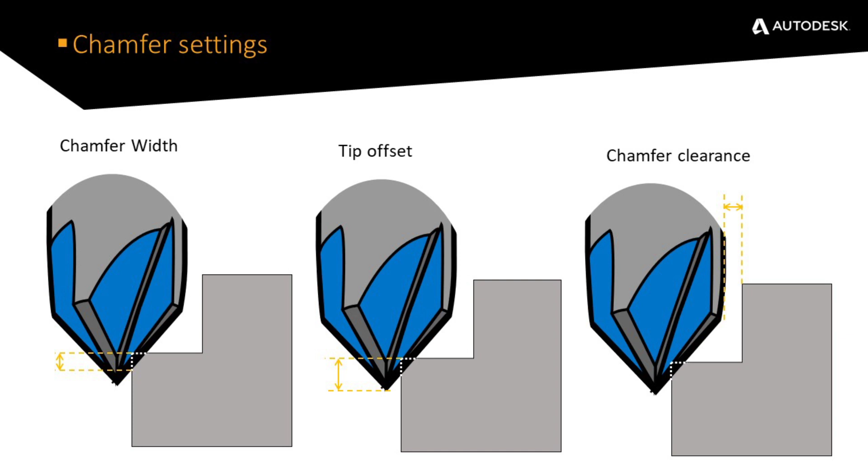So we've got 2 chamfers here on these 2 bosses, nice and easy to start with. I'm going to go down to 2D chamfer. First thing I need to do, of course, is select my tool, that's what I tend to always start with. I'm going to be using a 45-degree chamfer tool, 12mm diameter for this.

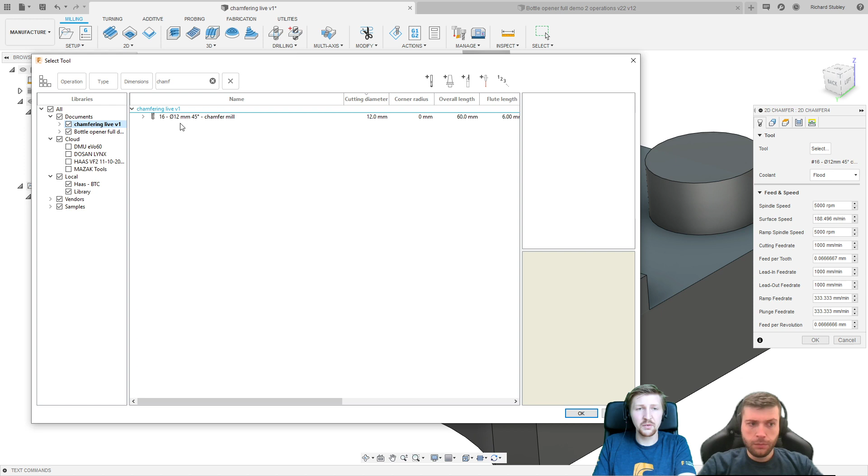If we just have a quick look at how I've defined this, we can start to have a look in here. Let's go on to the geometry actually first, I suppose. We're going to select just that one contour for now.

We're going to have a look at our passes tab, and I just want a 1mm chamfer. Now I'll go back to my tip offset, I'm going to leave that at 1mm for now. And then we're going to simulate, see what it's like, and then adjust it to get back into that sweet spot.

And then we've got the chamfer clearance, that's not going to make any difference here, we've got loads of space around the part, we're not going to be getting anywhere near any sidewalls. Again, not talking about feeds and speeds at the moment, we're just having a look at the toolpath and setting that up.

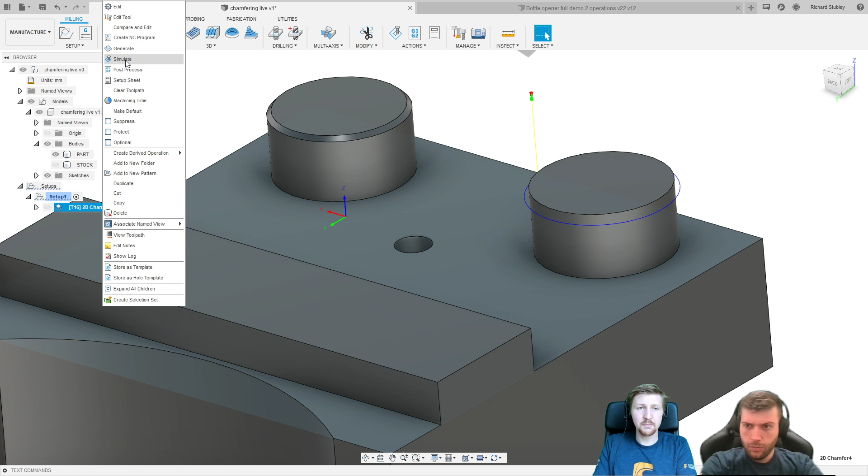So there we go, let's just simulate this, and let's play that chamfer on there. So again, we get a nice chamfer.

Little trick here that I do: if you're ever chamfering the model, I tend to turn the model off just so you can really see what's happening. Otherwise you don't really get a good idea of what's going on because the model's in the background there.

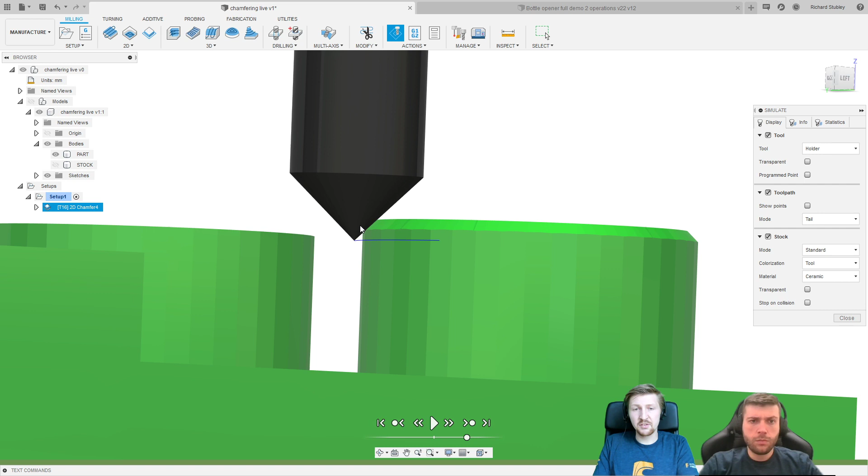So let's jump out of simulation mode again, and turn my model back on just so things look correct.

Then I'm just going to edit my chamfer toolpath. In my tip offset here, I'm going to put 3mm in. I'll talk about why I chose 3mm once we see the effect it's going to give. And then let's just simulate this now.

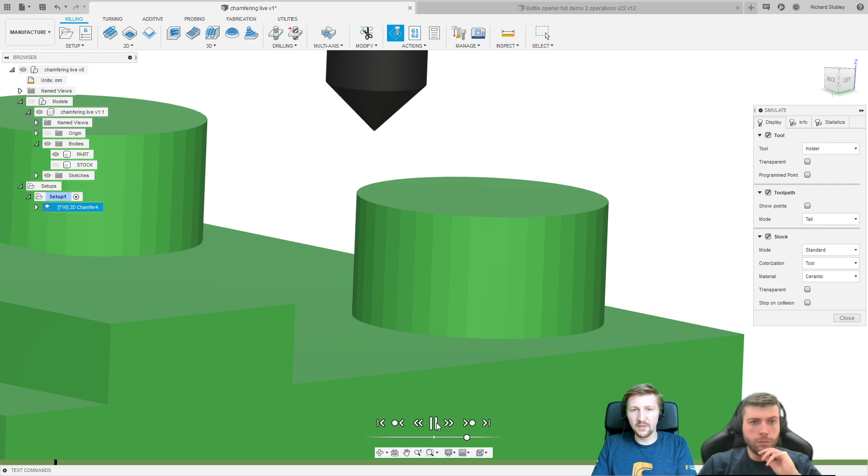Again, turn my model off, run that toolpath again, and I'm just going to pause it when it gets around the view. So we can see now we've managed to get much higher up. I could probably go a little bit higher if I really wanted to. We've got much higher up on that flute. We could have probably doubled or tripled our surface speed in that small move there.

So these little tips and tricks really do make a big difference when you're cutting using chamfer tools, and it's definitely worth spending the time to do a couple of test runs on your machine. So if you tend to use a 12 or a 6mm, just get to know how the tool wants to be used, the speeds and feeds, and then you can apply that as you go.

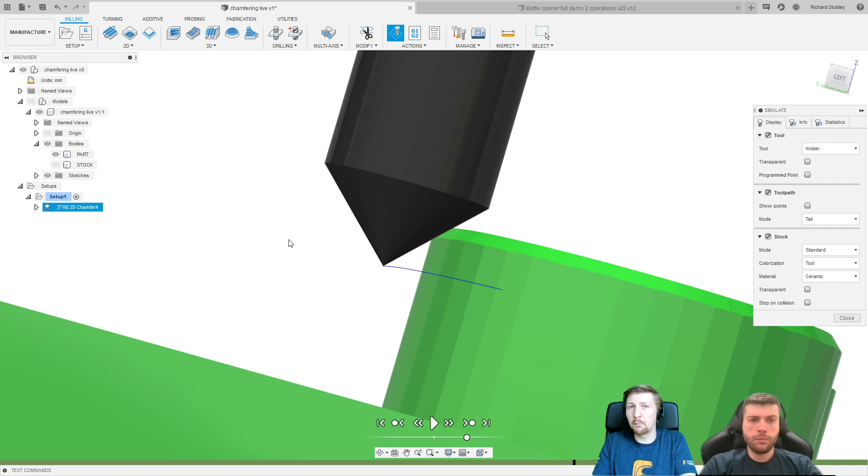Let's just close that again now. So I didn't just guess 3mm. I did a little bit of a calculation in my head, but I don't want to do that in my head every time I actually do the chamfer. So this might be new for some of you, but you can actually do expressions and calculations in all these boxes. So I'm going to do edit expression.

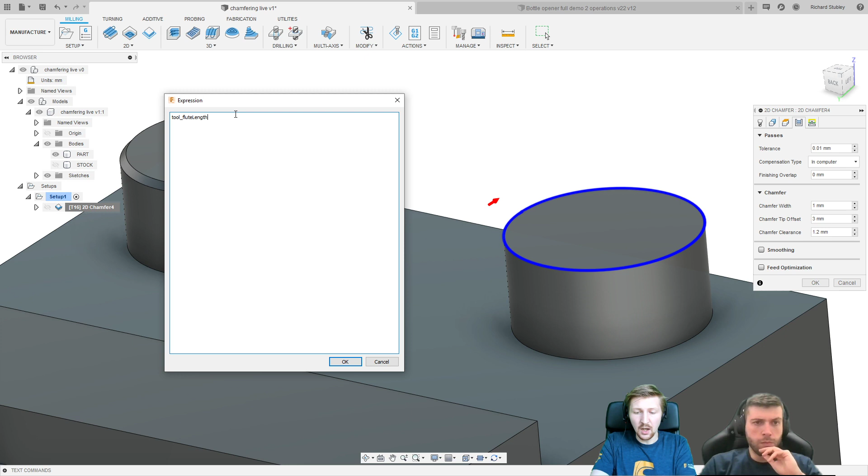That was just right click, edit expression there. And I'm going to choose my tool flute length. So that's going to be 6mm, because it's a 6mm flute. I then want to sort of minus my width, so my chamfer width. And then I want an extra millimetre of clearance on the top of that tool as well. So let's go 1.5, let's go 1.5mm. So that's going to be the expression in there now.

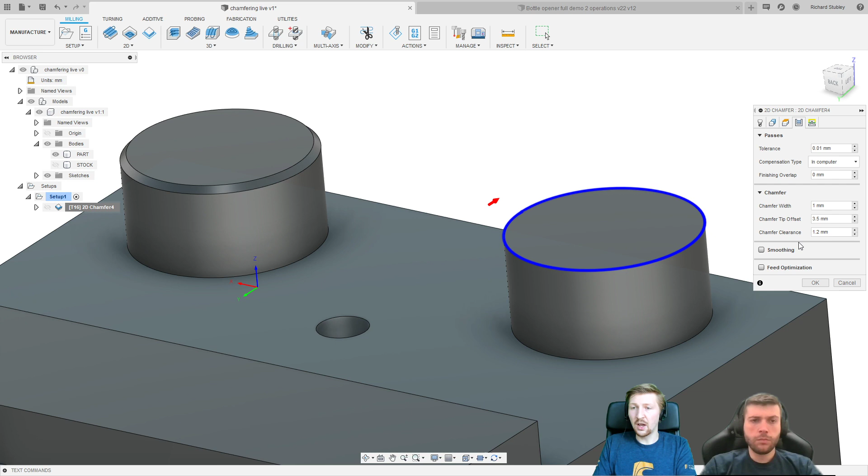So it's basically told me that my tip offset is now 3.5. So that's going to leave 1.5mm above the tool where I'm not in that zone where I'm risking a burr because I'm too high up.

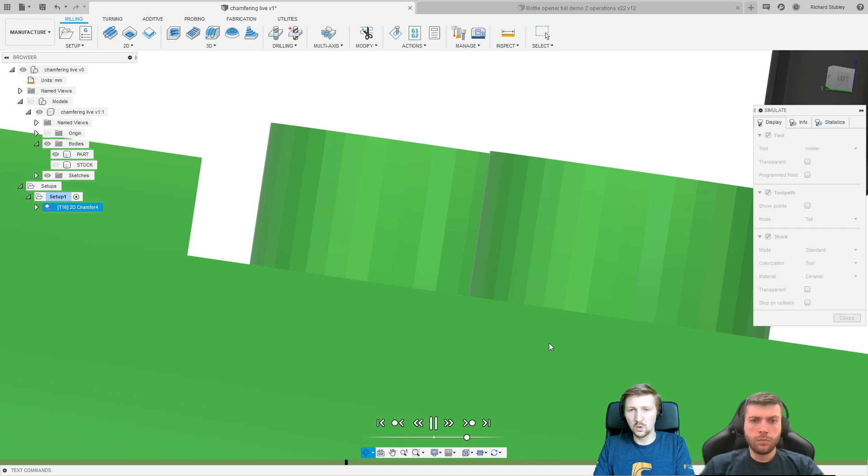So let's just play that. Again, turn my model off. Let that tool come all the way around. And you can see now I'm really getting a good portion there. Now the brilliant thing about this expression is that that's going to be there every time I want to do a chamfer.

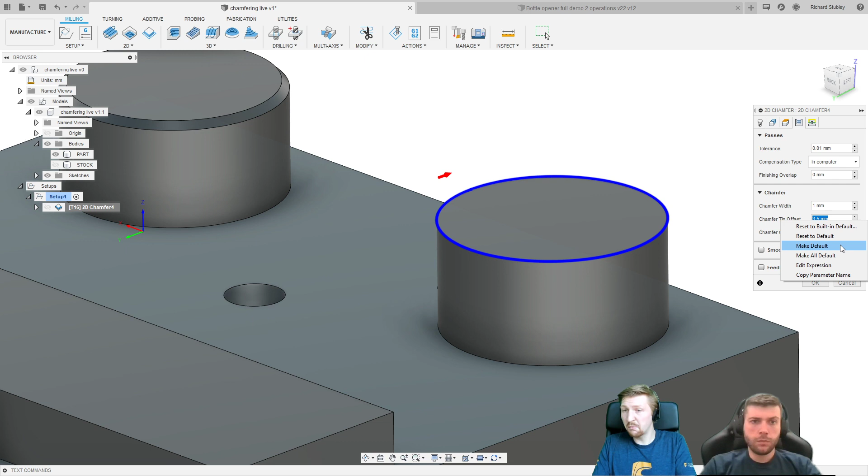So what I can do now is right click and edit. If I want to, I can save that as default. So I can make that as a default. So now that expression is saved as a default. Every time I come to do some more chamfering, it's going to be there.

So that's a little bit about how we've machined that one. Let's quickly do that again. And let's go 2D chamfer. Let's pick that contour. It's remembered my tool because I've just used it. And again, we've got this perfect scenario here where it's known that chamfer width.

So if I just change that chamfer width to 1.5, you see it's just changed to 3. You get the idea. If I change that to a 2mm chamfer, it's changed my tip offset. So that's a really good default to have in place. It's one that I personally have, but you do need to know where that's not going to work. So there are a couple of scenarios where you're going to need to override that default that's in there.

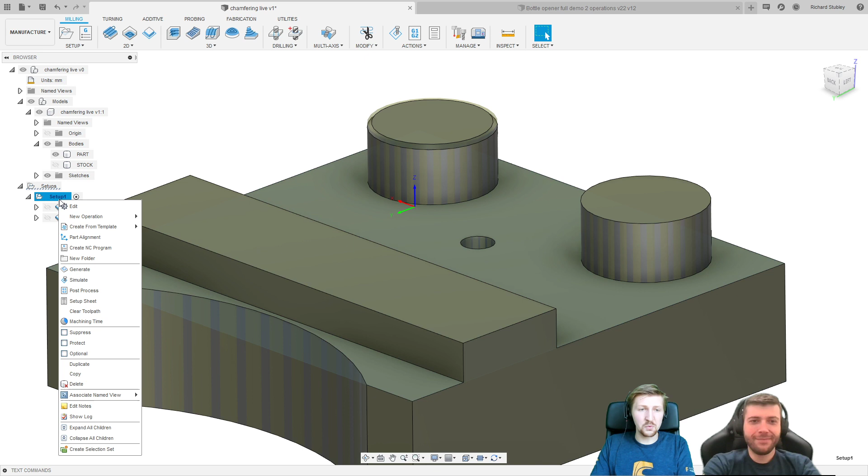Let's just have a quick look, make sure that everything's working as it should be. Turn the model off, hit play, turn the speed up a little bit on there. There we go. And that's putting a really nice big chamfer on there for me.

But again, one thing that I just really want to point out in here, if we just reverse a little bit as we go up, you'll see here that we've got a red plunge move here. So unfortunately, that's going to be a really slow feed rate. That's because we tend to prefer safety over speed in Fusion.

But what we could do is actually on here, we can look at that toolpath I've got here. I want to edit that, go over to my heights, feed height, and actually disable that. So it's going to go right down straight away at the rapid speed and not do that really slow move. So let's simulate again.

And I'm just going to press play. Let's turn that model off again. So chamfering there, I'm just going to slow it down now. Hopefully you can now see, there we go.

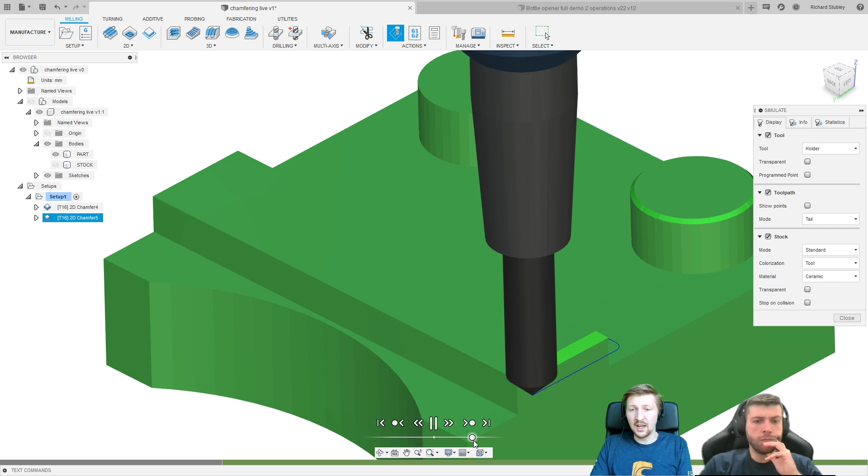That red move has now turned into a yellow rapid move. We prefer safety over speed any day of the week, but I know personally I can disable that plunge move and just rapid straight down and move across. This is just showing some little tips and tricks you can do. If you really want to be brave, you can set that as your default, but I personally prefer to leave it to do the plunge on the slower speed, and then if I remember, I'll turn it off.

If I forget, I go slow. If you do the opposite way around and you forget, you crash the tool. So I prefer to always put safety over speed, in my opinion.

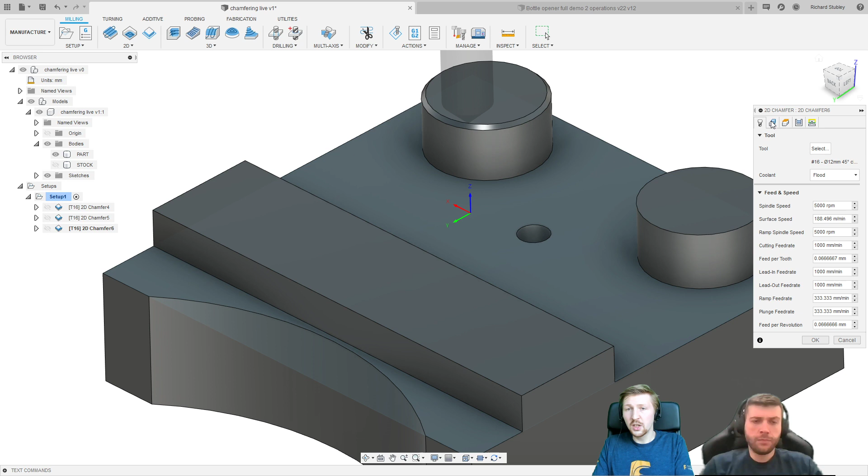So what we've got now is a modeled chamfer. We had a non-modeled chamfer on here, and we've got a modeled one here. I'm going to go 2D chamfer, choose my geometry. Now this is the key one - I'm choosing the top contour on this. So when the chamfer's modeled, you choose that top contour.

But one thing I need to bear in mind now is that what I chose here might not be correct. I'm just going to press OK and run through and show you what I get. I'm going to leave it at 1mm chamfer, leave that tip offset in, chamfer clearance, leave all that as it was, and see what we get.

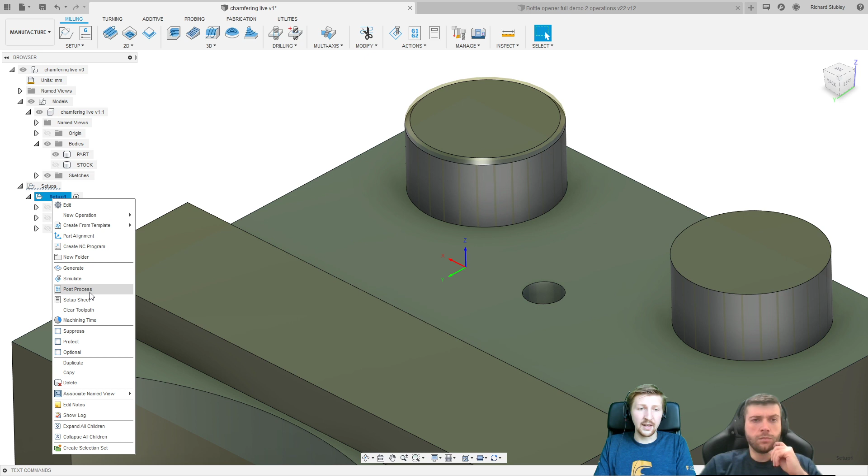There's a lot of simulation in this. I'm just going to run through those two toolpaths, and go to this next one here now. You might notice that is a huge chamfer in comparison to that one, but I set 1 mil, so why hasn't it worked?

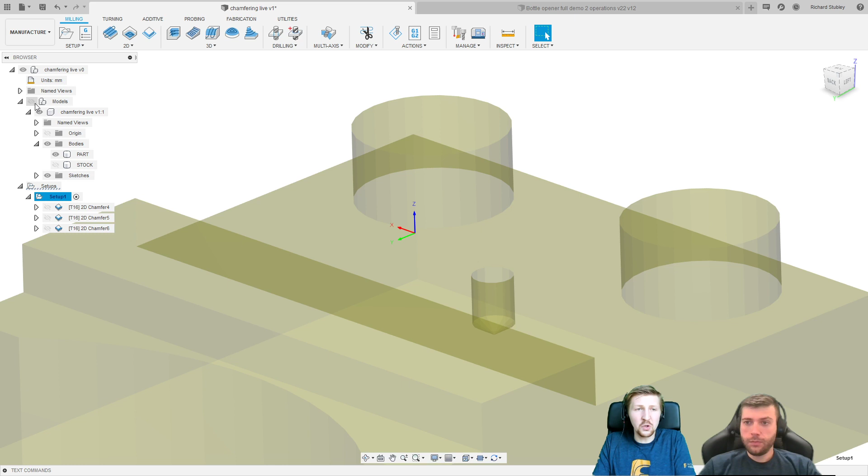It's all to do with if it's modeled on the part - what you've effectively got is a 1 mil chamfer that's been modeled, and then an additional 1 mil chamfer that you've programmed in there now. So I need to remove that and set it at 0. Remember I said earlier about watching out, that default you've just put in could catch you out occasionally, and this is an occasion where it will.

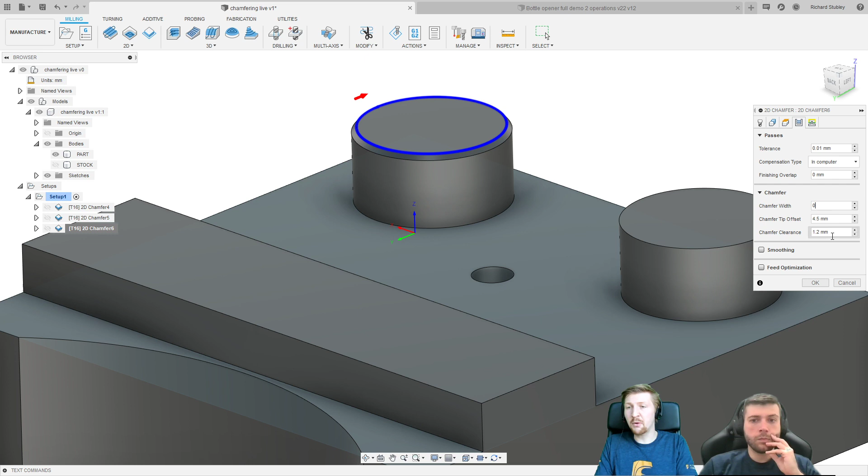I'm going to leave that at 4.5 for now and just show what happens. Just to quickly go over that in case you missed it: if the chamfer is modeled, you choose the top contour, then go to passes, chamfer width 0. Okay, cool, there we go, cancel.

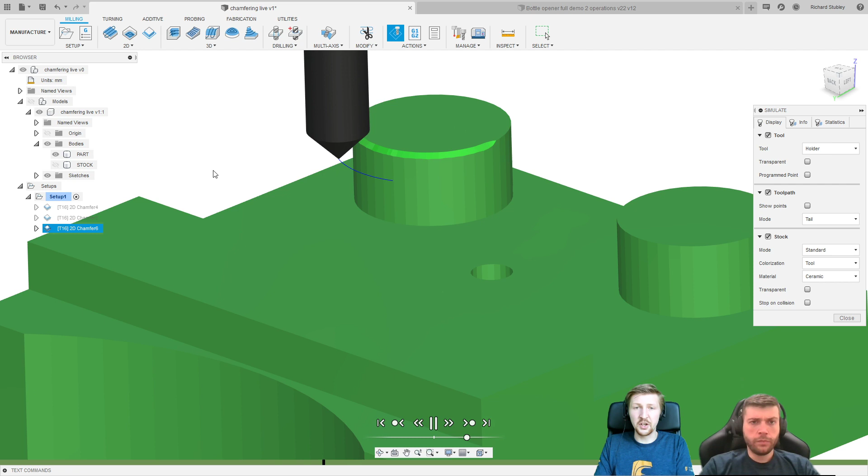I'm just going to simulate that one and turn that model off. You can see it's doing the correct 1 mil chamfer, but it's a little bit too high on that tool for my liking. That's because the default on there for the calculation I set is no longer true.

Because of course, if I look back at my expression, I had the chamfer width in there. The chamfer width doesn't now exist, it's 0 because the part was modeled. So I need to make a manual judgment on this - I'll probably go back and set that manually at something like 3.5.

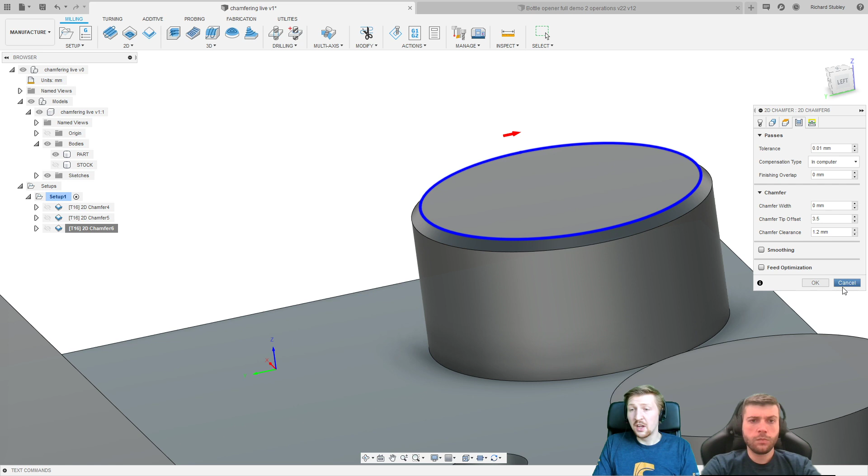So yes, that default is brilliant and it works for non-modeled chamfers, and if you want to, you can set it up for modeled ones too. But just bear in mind, if you start setting yourself new defaults, you've got to know the cases where that will work and where it won't. I hold no responsibility for any broken chamfer tools.

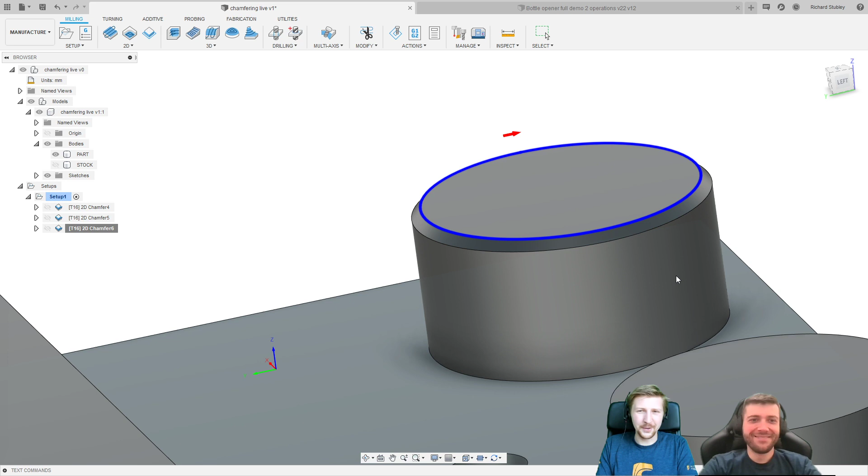So there we go on there. Okay, cool, so we get on there.

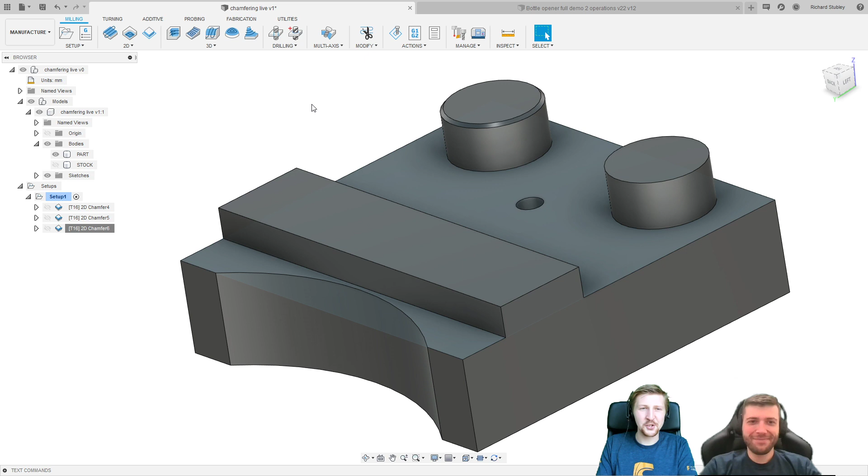If you've got any questions, I'm a bit famous for being able to talk all day long without stopping, so please just chuck your questions in the chat. Paolo will interrupt me, as he does most days, and let me know what's going on. I see we've got a guest, Alon, watching us, making sure we're all doing all right, making sure we're 6 inches apart from each other. If you could convert that 6 inches into metric, please, Al.

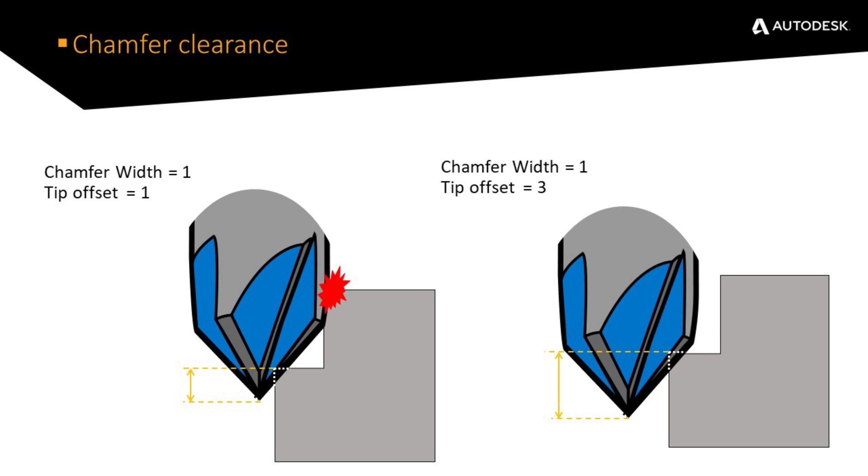So that's just a little tip here. You've got to look at this and try to balance up how things are going on there, really. Okay, so what does that look like in practice?

What we've got on here, we're going to do a 2D chamfer, and the first thing we're going to look at is this contour around here. I'm just going to do a 2D and go contour selection. But I definitely don't want to do that contour, I just want to go around here. So a little tip for you all.

If you hold down Control and Alt, you actually select an open contour. And what you can do then is start to go into there and edit the way this is selected. So let me just try that again.

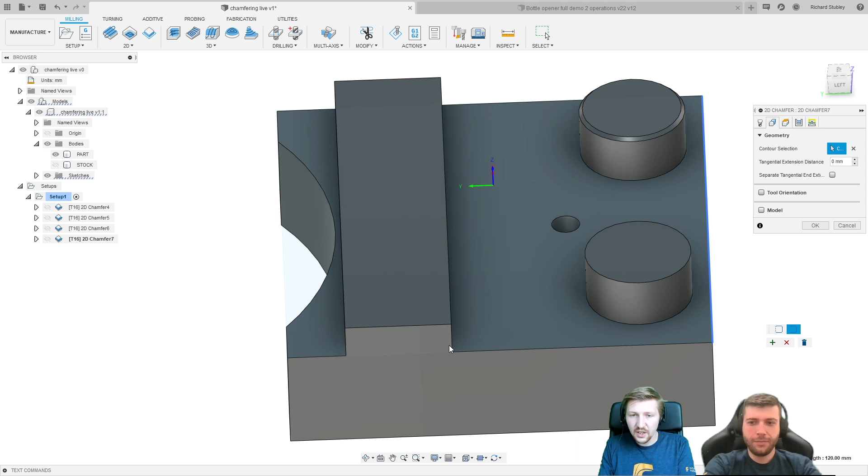So I'm going to choose the contour selection, go on there. I think I've got a weird bit of a surface on there. Let's go for this one instead.

So let's go 2D chamfer. I'm going to choose that one. So you can see I'm really quite close to the edge over here. I'm actually moving around now and coming back to there. So that's what we've got.

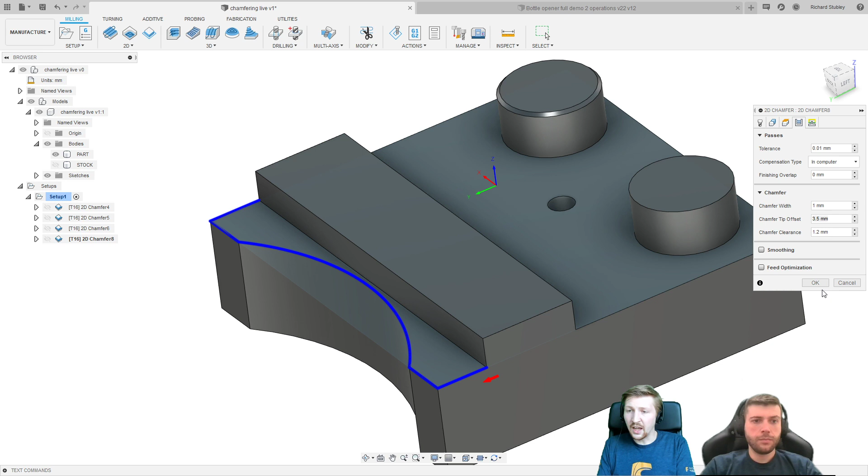I'm going to go on to the passes. Chamfer width again, 1. I've got my automatic expression there that's calculated a really nice position for me. I'm just going to hit OK and see what happens, and we'll talk about the result we see here.

So we've got a broken chamfer there. And what it's done effectively is it's done what it can do respecting the parameters that we've entered.

So let's just simulate this and see what's going to happen slowly. We're going to cut what we can there. We're going to then come over, just turn that model off, and then cut the other side. So there we go. What Fusion's basically done is, you've given me a set of parameters, you've given me a contour, and I'm going to try and machine as much of that as I can, as safely as I can.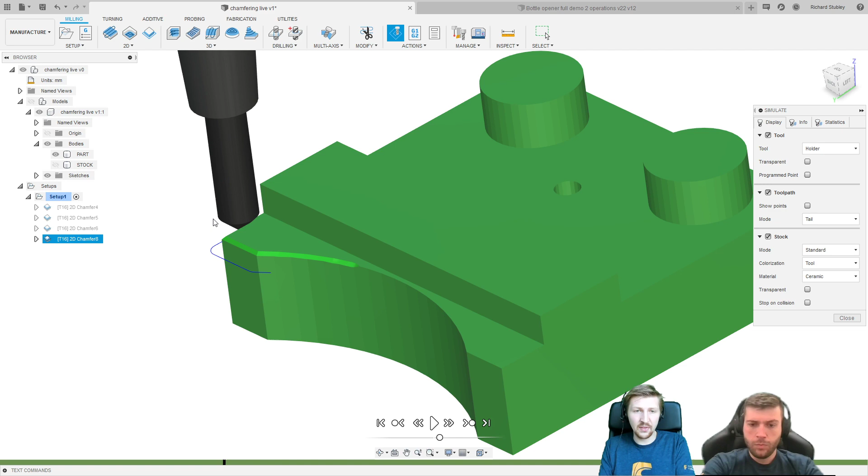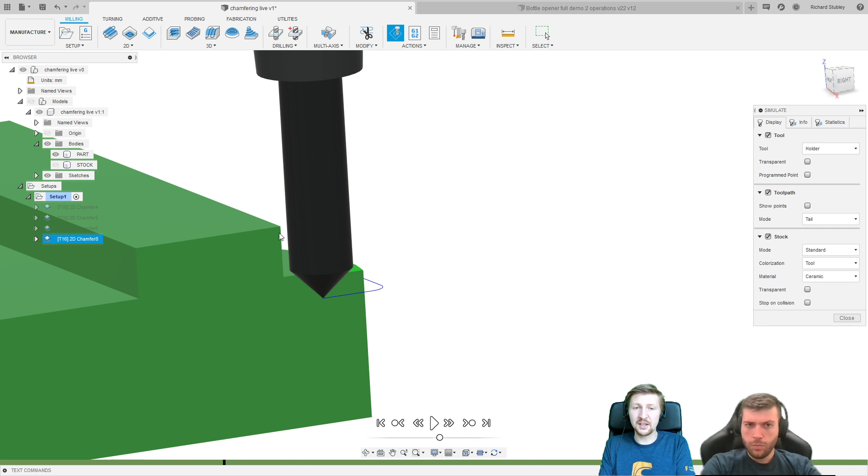So I want to talk about two aspects of this toolpath. The first one is I want to see how close we've got to that wall at the end there. Bear in mind that my contour selection went right up to this edge here. Of course, we know there's no way I can get exactly there because I'd end up hitting the shank of my tool against the side. So what Fusion's done is respected that 1.2mm chamfer clearance and kept 1.2mm from the side wall to the shank of the tool. So that's what we've got here.

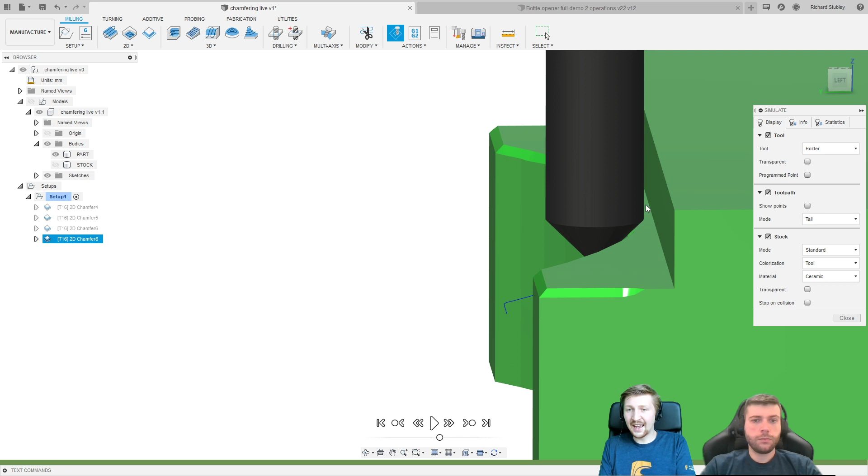Now the second aspect of this toolpath is this big gap in the middle effectively that I've got. So let's just model it up. And again, that's doing exactly the same thing. So if I just leave that tool just there and have a look, it's saying I cannot get any closer with what I've got here.

I've heard people call this the magic chamfer tool before, but I do think it really is one of the most underrated functions that we've got at the moment. It's so clever, and it's saved my skin on many occasions.

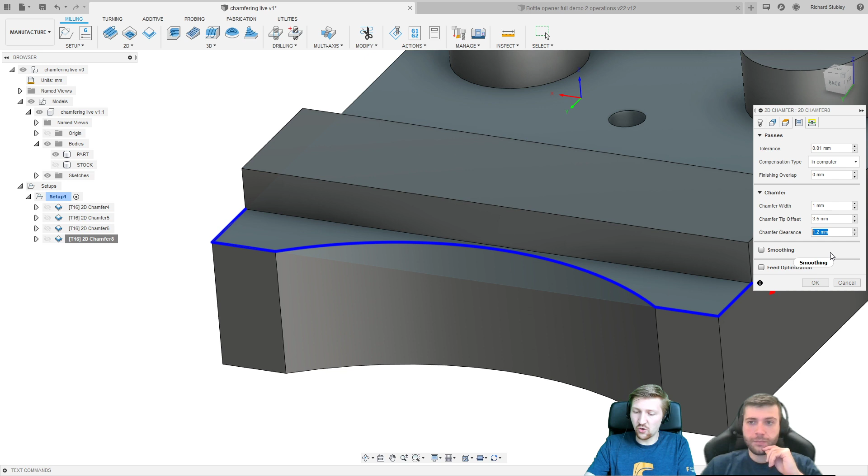So I'm going to go to my passes, and I'm going to be brave. I'm going to drop this down to 0.5mm. I'm just going to hit OK and see what result I get. So it's got a little bit closer. I've got a bit closer over here, but I've still got this big gap in the middle.

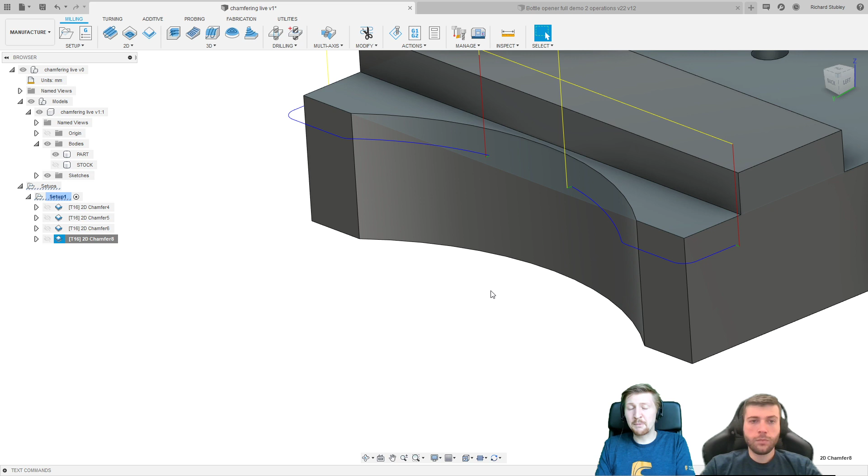So let's try and go a little bit braver still, and let's go to like 0.2, see what we get. You basically see that this is just a big balancing act, really. And again, I've got a little bit closer there, a little bit closer here. Let's simulate it and have a look how much closer I've really got.

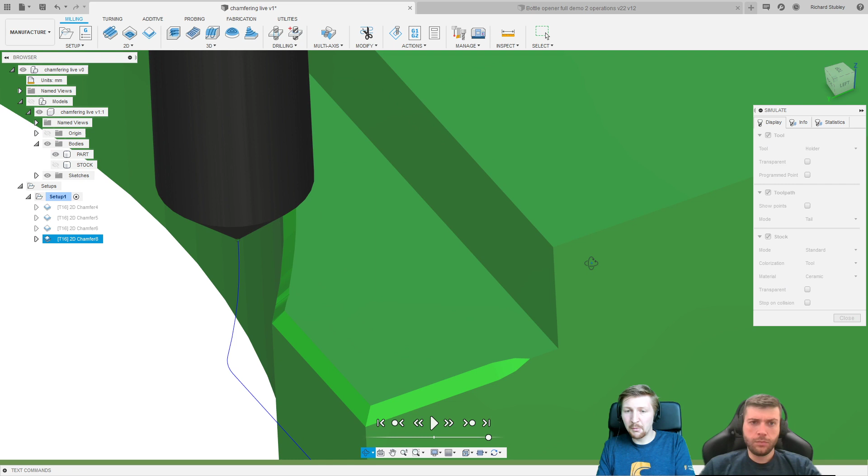So I'm getting a little bit closer. Every time I make a change, it's getting a little bit closer over here. But I've still got this big gap in the middle.

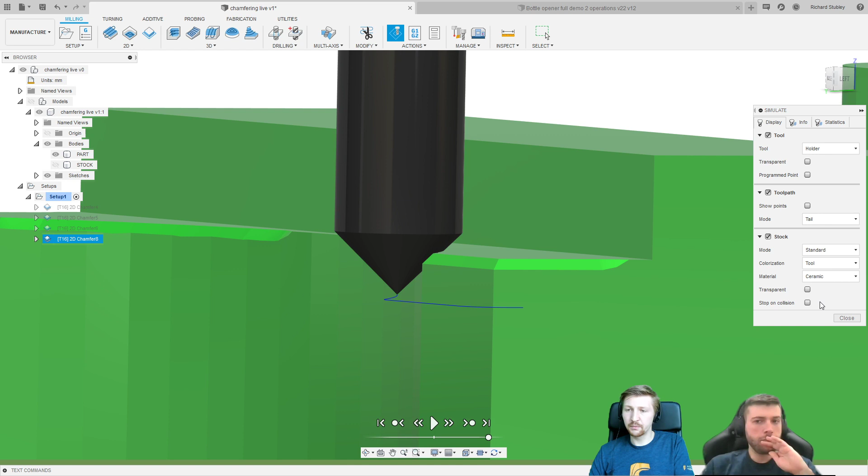That's because I'm going to have to start making sacrifices now on my tip offset. So like I said earlier, we had that sweet spot up here, the no-go zone at the bottom of the tool, and the no-go zone at the top. We're really going to have to start pushing this tool down to here and get that top portion. So let's come back in.

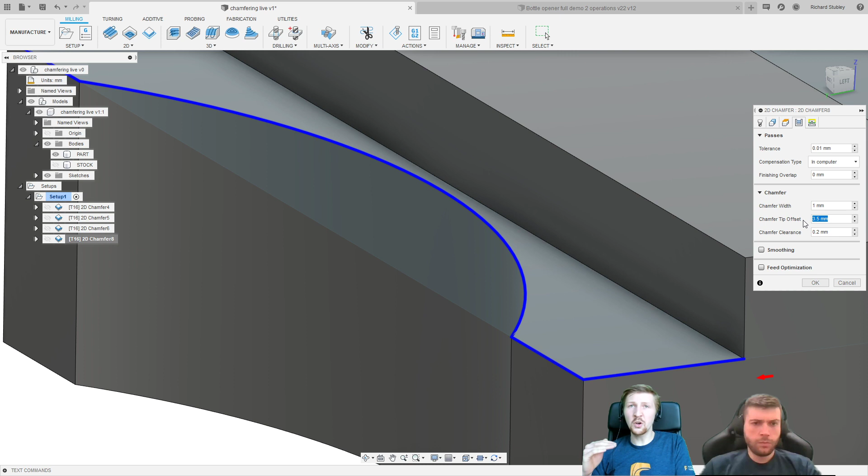Let's just edit this. And what we've got now here, I'll go to top tip offset. So how far can I go on this? If I'm honest, if we're not looking at the problem with the burrs, we can go straight to 5mm. So what does that look like?

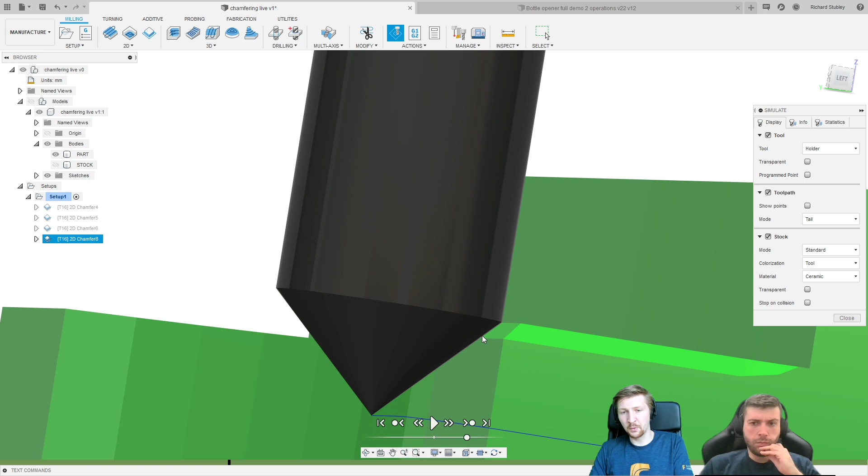It's got the full contour selected there. Let's simulate this. In theory this will work, but in practice everyone knows there's no way that's going to give you a good chamfer with that being right there. The whole point of that is it's come round, and we've got minimal clearance now over here.

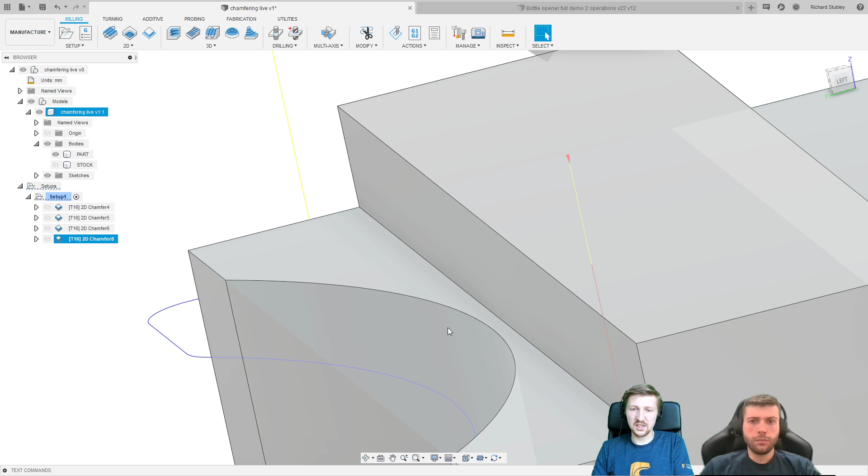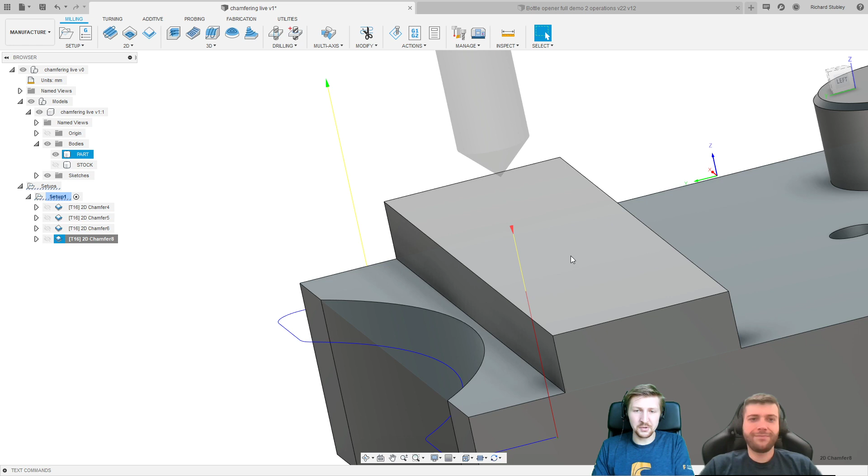You can start looking at it, I could measure that distance and start calculating it out. But if I'm honest, I'm quite lazy, so I just use the calculation speed to my advantage, and play with these numbers to see at what point it breaks up. So 4.5 it broke, let's try 4.7... let's have a look at 4.6. It's broken up again, okay.

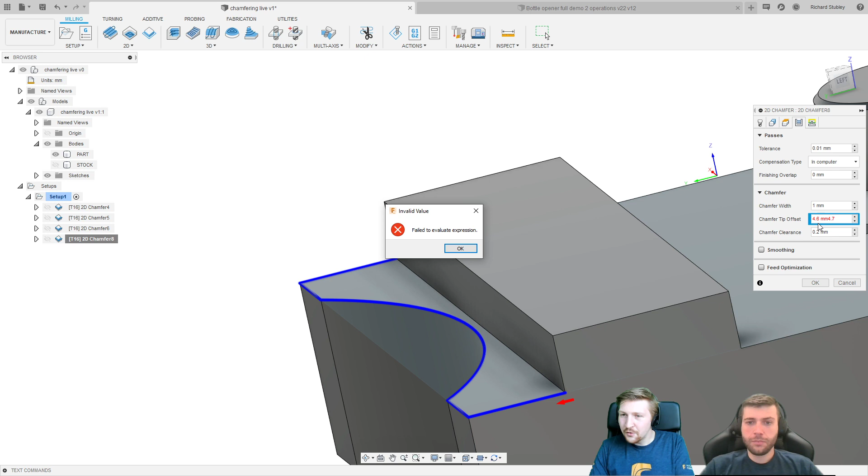So let's go back to 4.7. Again, my mathematics, there we go. It fails to express at 4.6mm, works at 4.7. I mean, why isn't it clever enough to realize I made a mistake there? 4.7 - so again, it's realized what I've got going on here now, and it's got us close to there.

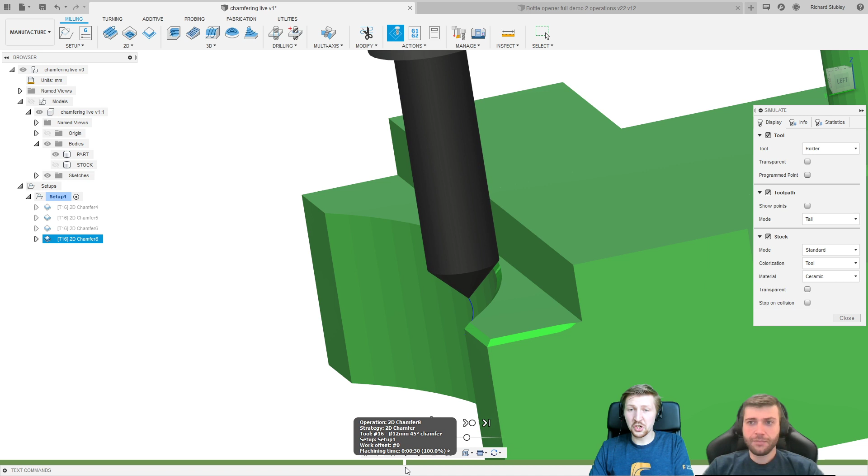Let's simulate this and see what it really looks like. Hopefully you're seeing the difference between balancing tip offset and chamfer clearance. They're both two different things, but they do work together - you do need a bit of a balance of the two.

So again, that's going to work. It's not going to be the best - it's getting a bit too close really to the area where we're going to get burrs, but I'm confident that for just this small part, it's going to be good and it's going to work for me.

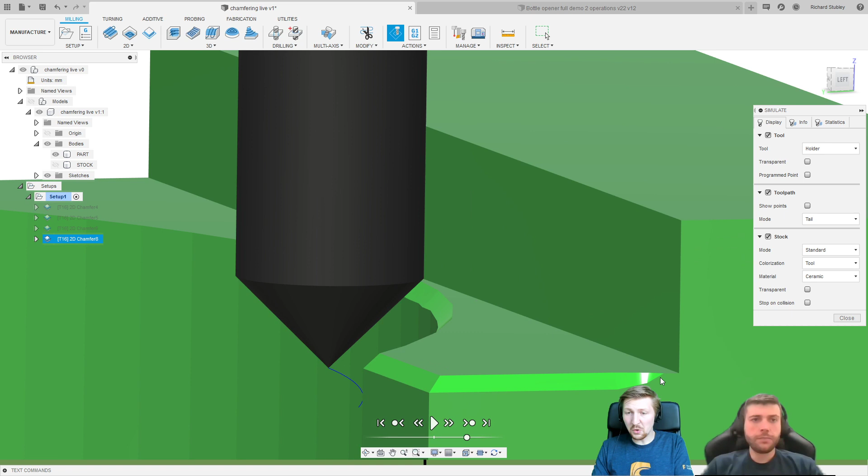We can also see how close we've got to this edge here. Imagine if you had to try and calculate how much to back off this edge, and restrict how much you're doing. It's a really nice function that you can back off there and it works automatically. So again, that's what we've got in here.

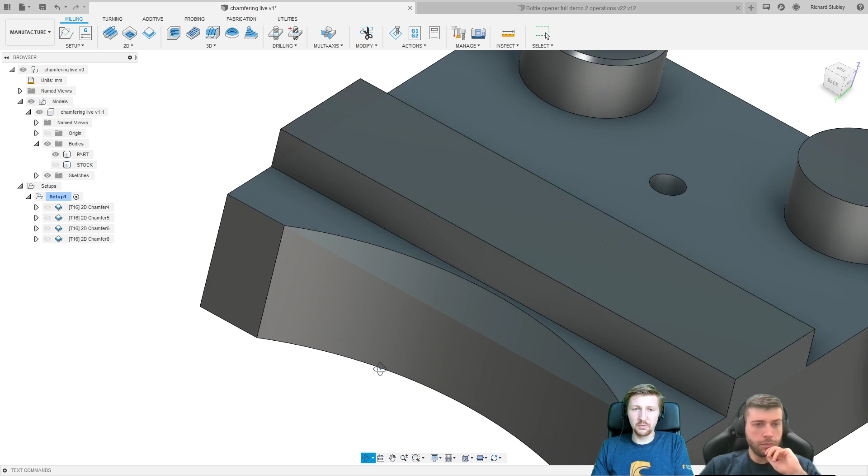So the eagle-eyed people amongst you will say, why haven't I done what I did before - gone into here and set feed height from, and then disabled that? So again, it gives me that really nice, quick rapid down, feed move here and here, cutting move in the blue, and back up again.

So if any of you are wondering why we've got these different colours, it's so you can see the difference, but also there's a little tip in Fusion which some of you might not know about. If I right click and edit, you'll notice that's a blue icon, the blue passes, and you've also got yellow and green there. The hint is that if you change things in the blue tab, it will change that one; if you change things in the green and yellow tab, it will change that one.

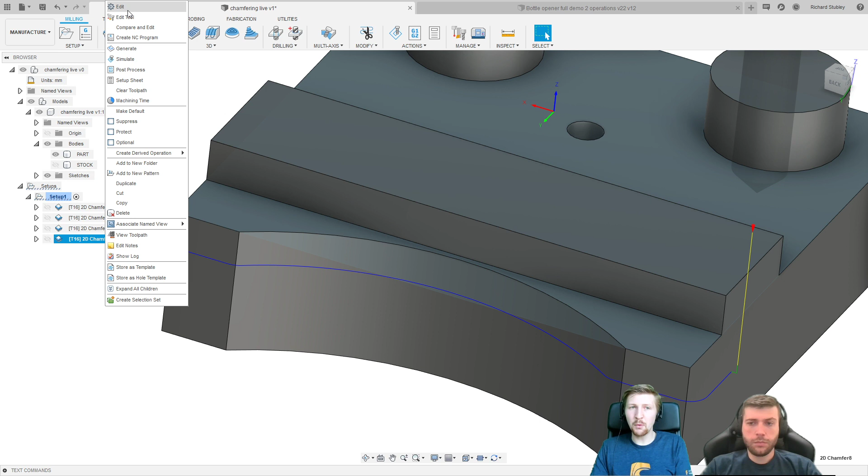So I'm going to put a little bit more linear lead-in distance, I'll put 5 mil just to make it big so you guys can see what I'm talking about. You can see I've adjusted something in that tab and it's adjusted the other one. The same goes for most of the toolpaths we've got. We try and keep that theory going, that you've got blue and then yellow and green, so that's the linking moves and the cutting moves.

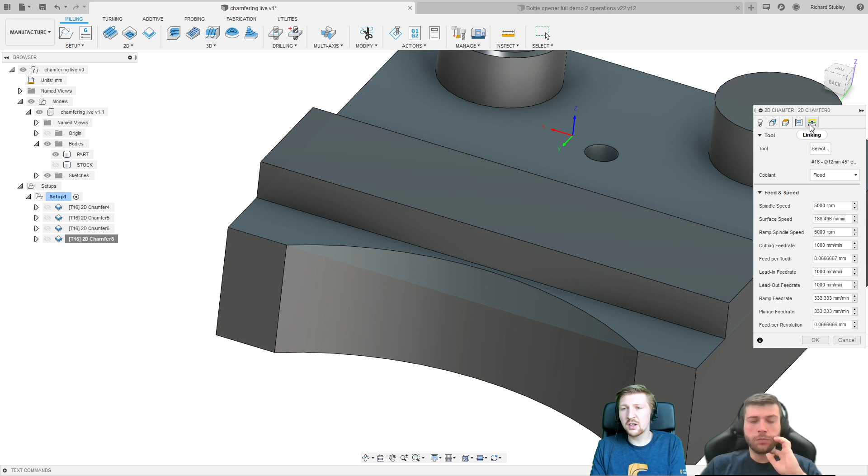Hopefully anything you touch in that pass will affect that one, anything in the other one will affect the other one. I mean, there are some areas where that does cross over a little bit, but that's the general consensus that we try and keep going.

Okay, so now I need to basically break all the rules I've just told you. So yes, I could put a smaller chamfer tool in to machine this. Let's just quickly see what we've got here. We've got an 8mm diameter hole there, and we're going to try and chamfer that with our 12mm diameter tool.

Now I could just come down and spot it, but I don't want to be doing that. It's not very good for the tool, you can get lots of problems with chatter. I want to use it like a chamfer mill and go in, lead into the cut, do the cut round, and then lead back out again.

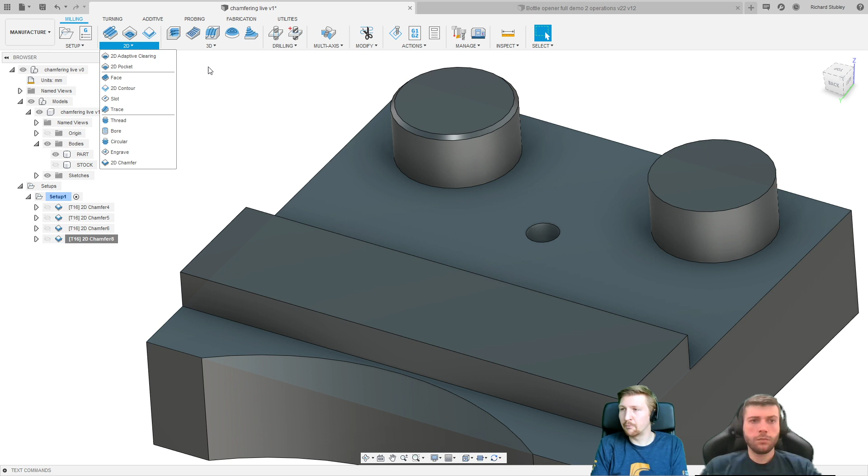So I'm going to go 2D chamfer, click on there, and I'm going to do nothing. I'm just going to hit OK and see what I get. So, got a warning. What have we got? Empty toolpath. The contour was not machined because the given lead parameters would cause a collision.

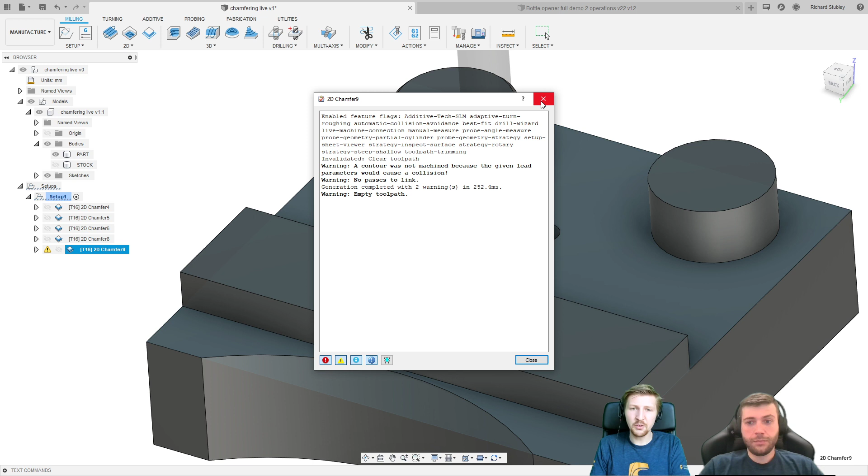Okay, let's have a quick look at what we've got going on here. So, let's edit this toolpath, let's look at our linking. So what it's saying is it possibly can't fit that in there.

So, let's whack this right down and see what we get now. Right, we've got something, but that is pretty much still going to be almost a spot. It's going to come down, it's going to do that. It is pretty much still going to spot that hole, it's not going to mill it properly.

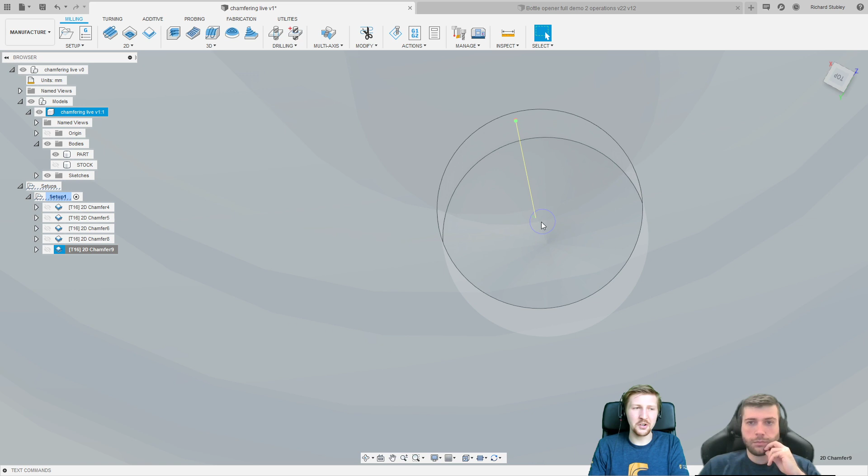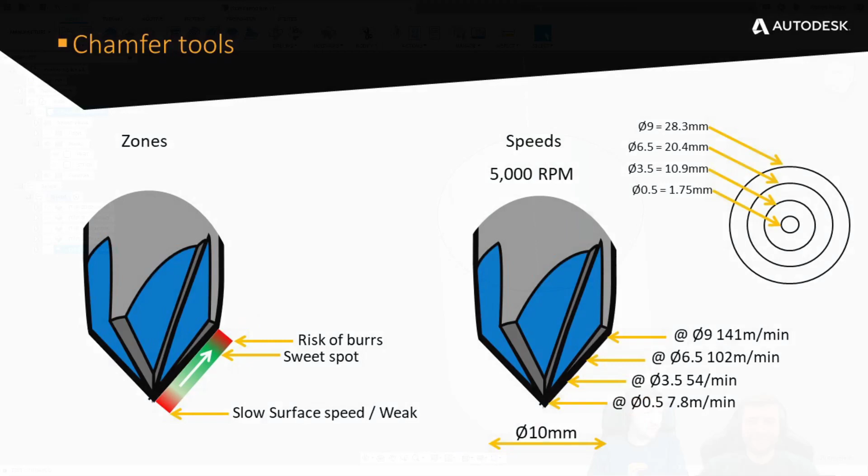And that's because I now need to break all my rules I was telling you. We go back to that first look at the chamfer tools, and we look back at that sweet spot. Unfortunately, I'm not going to be able to get that. So what I need to do is bring that sweet spot down for this little hole, go down a little bit closer to the tip, and effectively make a smaller chamfer tool by doing that.

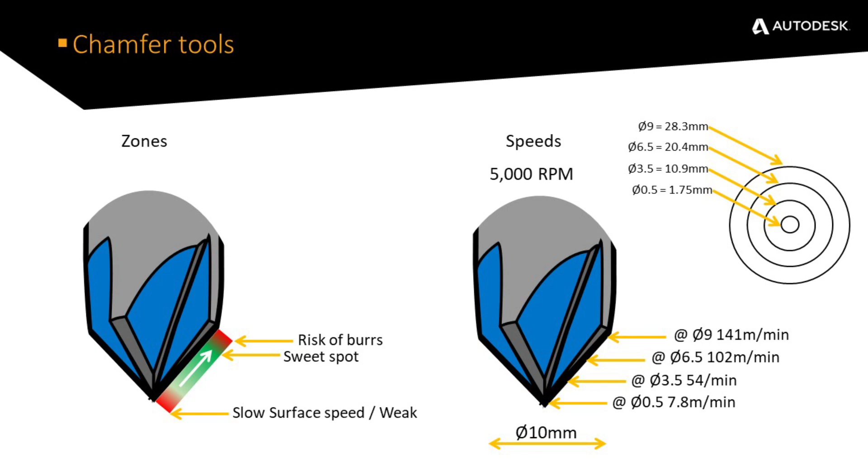So, that sweet spot sits at about the 7 diameter mark, so 7mm in diameter. I've got an 8mm hole, you can do the mathematics on that. So what I want to do is bring it down so it's more like a 3.5mm chamfer tool.

So again, what I'm going to do is effectively go here, going into edit, and then I'm going to manually change this and put tip offset of, let's go for 1, let's go for 1.5, feeling generous today. And there we go, that's a lot nicer.

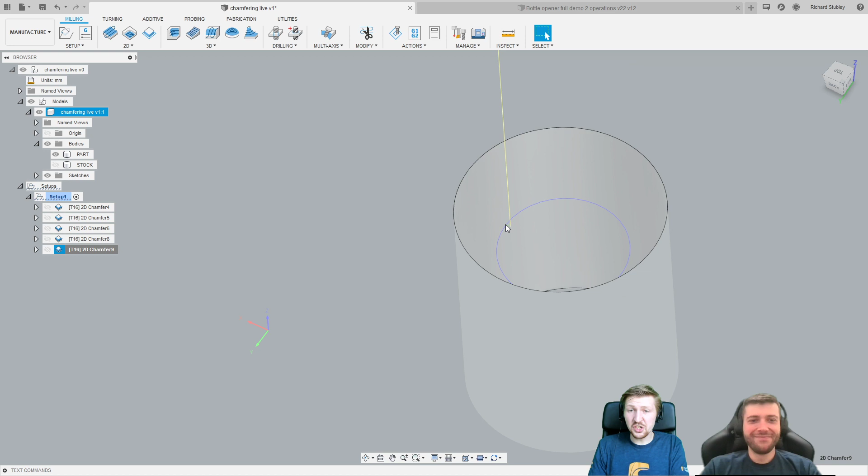This is probably going to plunge and catch on there. I do want to see actually what happens, so let's simulate it, let's have a look. Again, I'm sure a much better machinist than me is going to know, but I tend to just use the simulation, have a look what's going to happen. I tend to know what I want, but don't know how to get there at times.

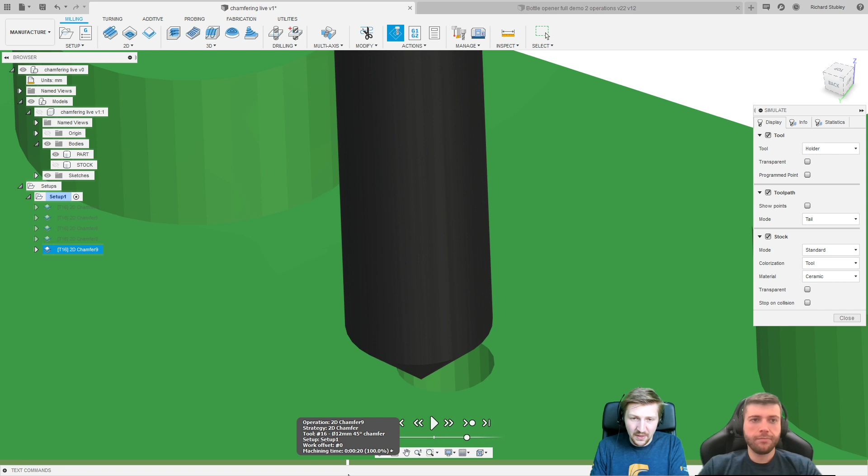So we are right on the cusp there of actually, there you go, we've plunged in and we've caught the edge of that chamfer tool, and I really don't want that because the speeds and feeds are going to be wrong. It's going to be plunging down in that Z angle. So you can just hopefully see there that on that plunge move, I'm just catching on.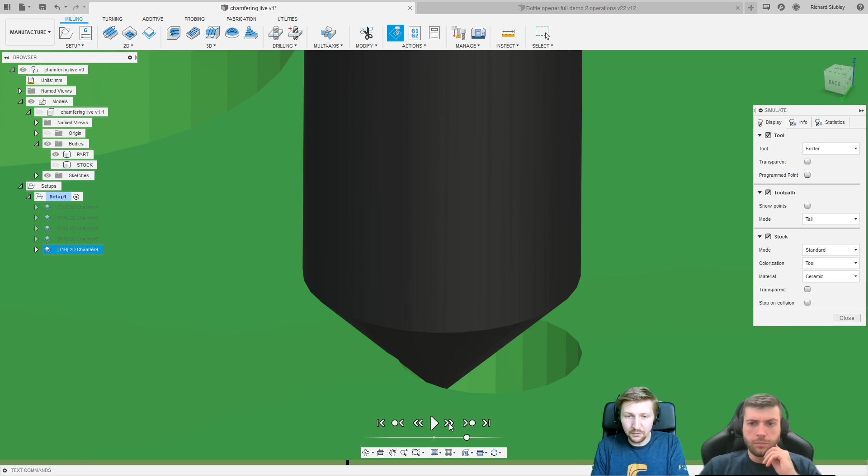I could use these arrows and move it that way, probably a bit more nicer for you to see. So I've got the plunge move, comes down, then got the lead in move there, and then I've got the whole chamfer move.

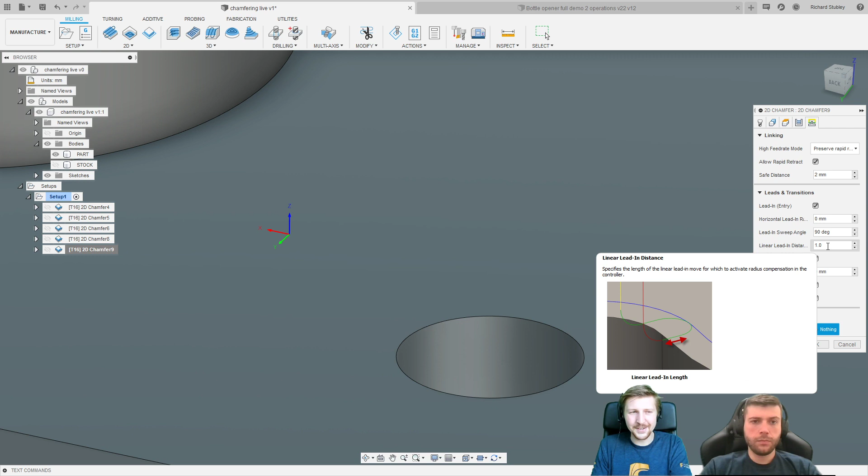So I want to try and change those lead-in parameters back to a little bit higher than what they were. So let's go for linear lead-in distance 1. I mean, if anyone doesn't use the tooltips, what on earth are you doing? We spend a lot of time getting these good, so please hover over, look at the tooltips, and hopefully they're going to give you a good idea of what they actually do on the product.

That is going to change that linear lead-in distance on there as well. So I'm just going to click OK. And you can see that linear lead-in has just come out a little bit more.

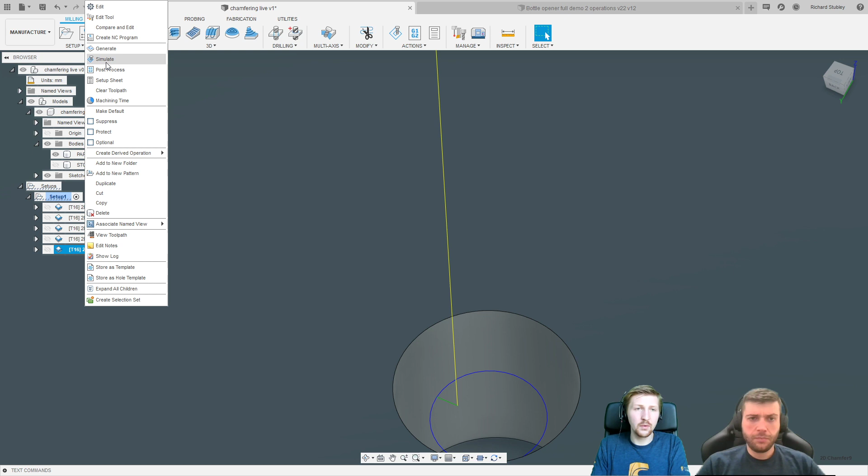We've got there, so let's just simulate. Turn the model off again, and play. Let's have a quick look at what happens now. Okay, cool, so let's pause it there.

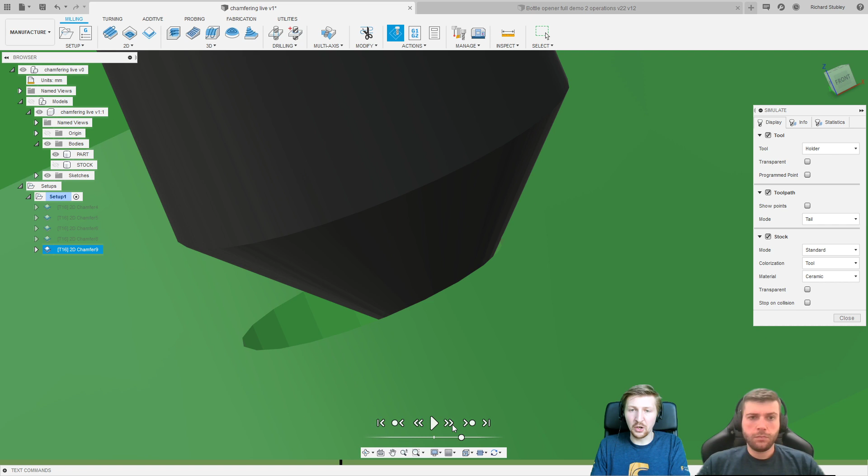So we can see I've finished my plunge move there. I'll just flip around to the other side of the model for you, so you can see I haven't cut in during that plunge move. I'm going to cut in that lead in, and I'm going to do my chamfer cutting.

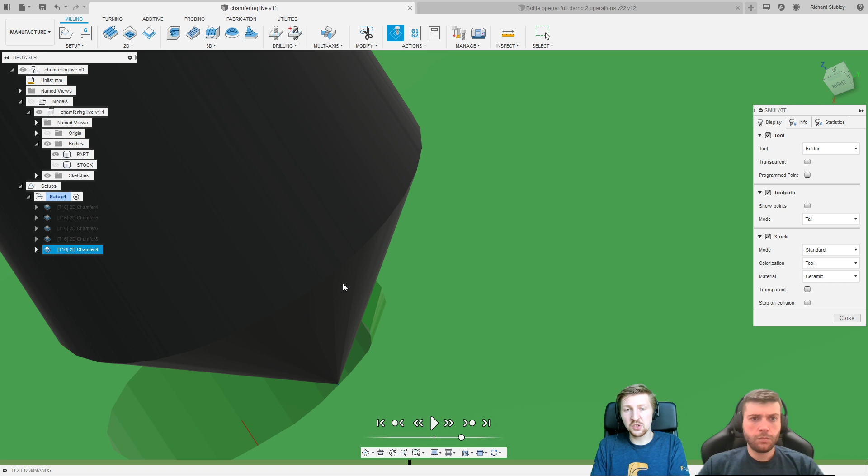Again, so it's not looking too bad. I'm not cutting right on the very tip. I'm not cutting as high up the tool as I'd want to, but I'm definitely not cutting right on the tip of that tool there. So I should still be at a decent surface speed on a nice strong portion of the tool, while still maintaining the ability to chamfer that hole.

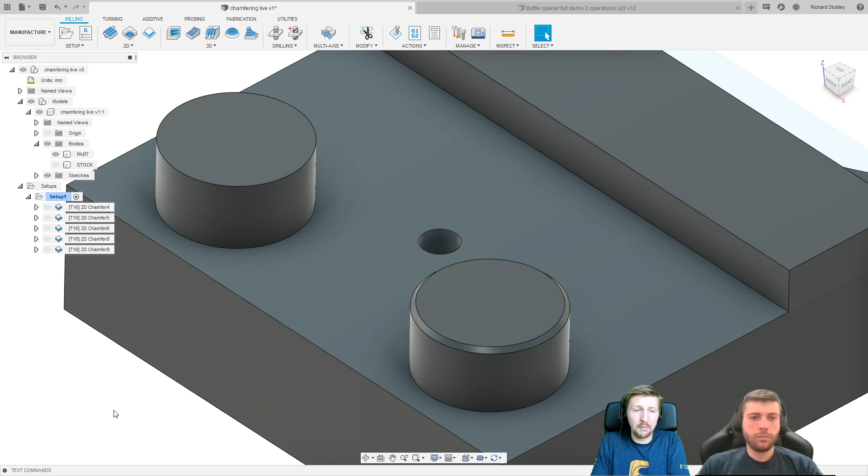Because at the end of the day, I'd much rather have a not so efficient toolpath than have no toolpath. I'd rather run it a little bit slower and risk a slightly worse surface finish than have no chamfer there at all. So yeah, that's pretty much my main tips and tricks on chamfering.

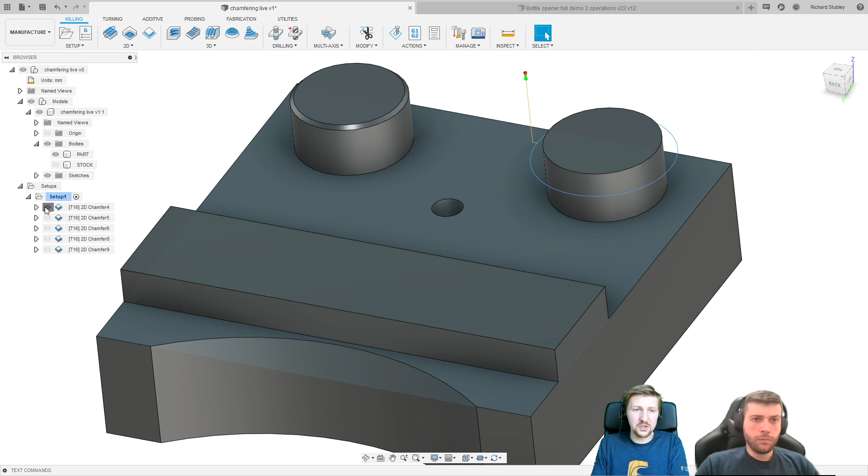So a quick look, let's look at all the toolpaths. If people haven't seen these new visibility icons and the fact that you can also hover over, it's some nice visibility stuff we've recently put in. So let's just simulate the whole thing and see how we go.

I'll let you just bask in that glory for a minute of watching the chamfer tool run round.